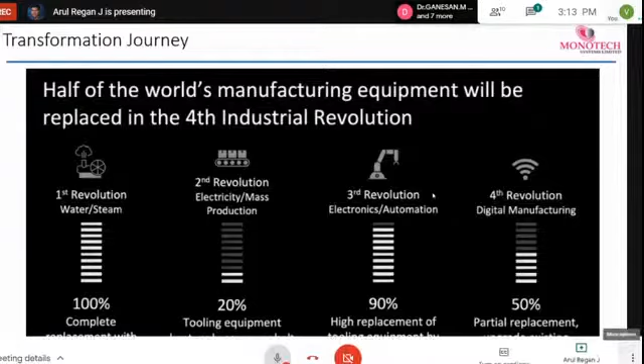Last February, 2020, this was not happening. A lot of professors came and we went to colleges like NIFT and IIT to present the benefits. So if you want to implement some technology, what type of benefit are you going to get? At least you get knowledge to enhance product development, and when implementing something, what type of return on investment will you get? When I invest 5 lakhs, when am I going to get the return on investment? These are the things we are going to talk about in our presentation.

Let me talk about different types of 3D printers. With our complete portfolio, we try to give you solutions, pinpoint the problems and pain points, and provide the solution.

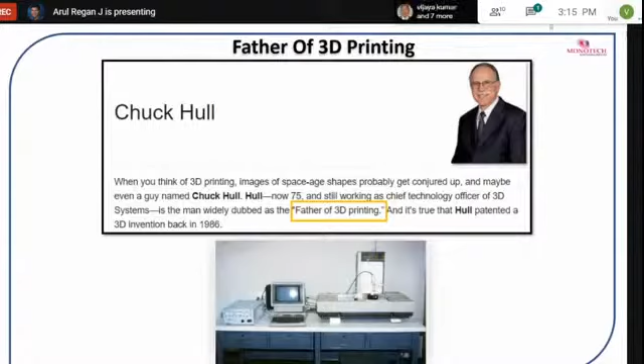When we talk about 3D printing, just as with conventional processes we talk about the father of the lathe machine, the father of 3D printing is Chuck Hull. Most people know about it, so I don't want to explain further. The journey started in 1986, followed by SLS and FDM technologies from Stratasys and other companies. This journey is a revolutionary technology that is still making a big impact in the market. He is the father of the 3D printer. Need is always the mother of innovation, there's no change in that.

This first green cup was produced using 3D printing technology, especially a liquid-based SLA 3D printer. This particular technology is still 100% successful in the market. Chinese players have entered the Indian market, but for this stereolithography apparatus technology, no one is a competitor. Here we use photopolymer resins, liquid-based resin cured with UV laser, to cure the parts and get the plastic part. This is the first video, I'd like to play how this journey started, about the 30 years of 3D printing.

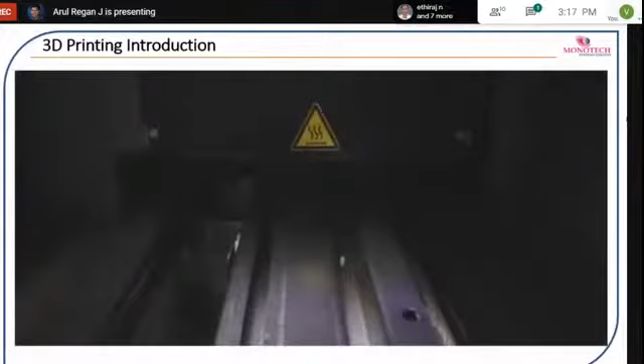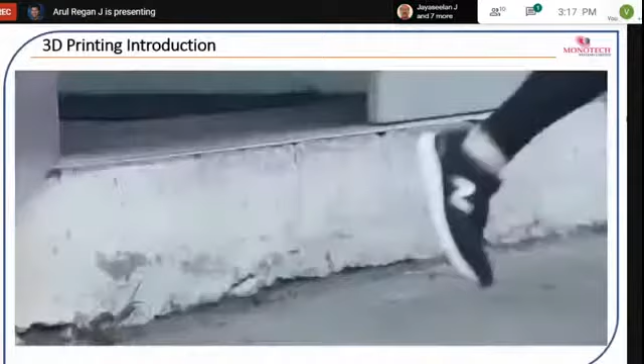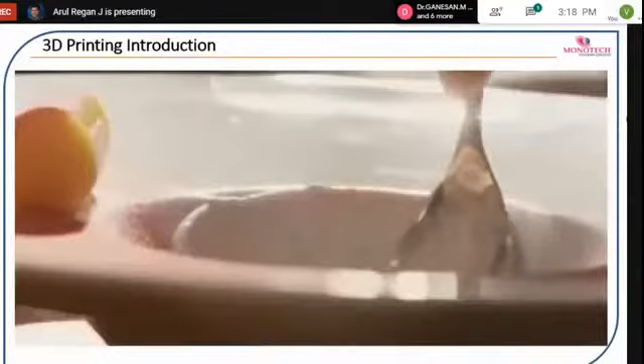It started with a little green cup 30 years ago on a California workbench. A cup that answered one man's what if. What if you could create anything? Design with complexity as limitless as your imagination. Store digital files instead of physical parts. Waste less, manufacture faster, customize products on the fly. One little cup, the first 3D printed part and the future of manufacturing. And where's that technology now? It's in the car you drive. It's in the classroom, it's on the silver screen and in the shoes we wear. It's helping travelers fly through the air and pioneers explore the universe beyond. It's making wheelchairs a thing of the past, and it's giving man's best friend a new pair of legs. It's allowing surgeons to plan and practice medical procedures long before they scrub in. It's producing complex metal parts on demand, breaking down the barriers of traditional production. It's driving new manufacturing business models, making customized and personalized production a reality. It's redefining what it means to play with your food. It's letting product designers, entrepreneurs, and architects share their ideas in vibrant color.

It's enabling designers and engineers to work seamlessly from digital file to physical part and back again, all on the desktop. It's empowering students with the digital literacy they need to become tomorrow's inventors, innovators, and disruptors, and putting parts manufacturing at the tips of our fingers on demand anywhere in the world.

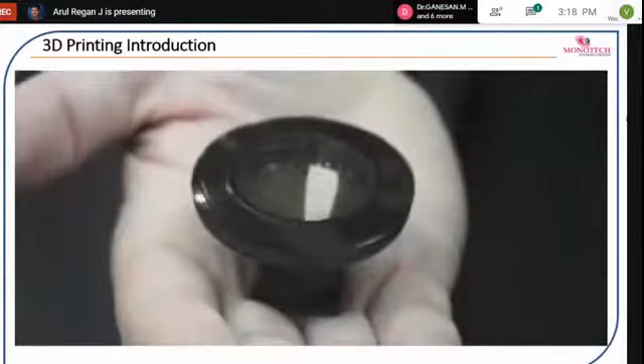Who knew that a tiny cup would lead the way for millions of ideas, inventions, prototypes, and products? That a single stroke of inspiration would unlock the potential within each of us to transform the way we work, learn, and live. For 30 years, our customers have used 3D printing to engineer tomorrow's breakthroughs. What does your future hold?

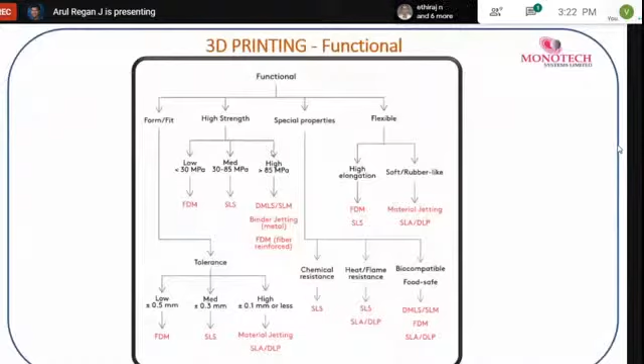I'm also from a mechanical engineering background. So generally, when I studied topics like form fit, high strength, and special properties and flexibility, these are some material science subjects we used to study. So for form and fit and high strength applications, we know theoretically what conventional process is suitable, and we may explore with existing lab facilities. But we can exactly replace these using 3D printing technologies, using FDM, SLS, or other DLP processes. So based on the functionality, how we have to split this, I am explaining in this particular slide.

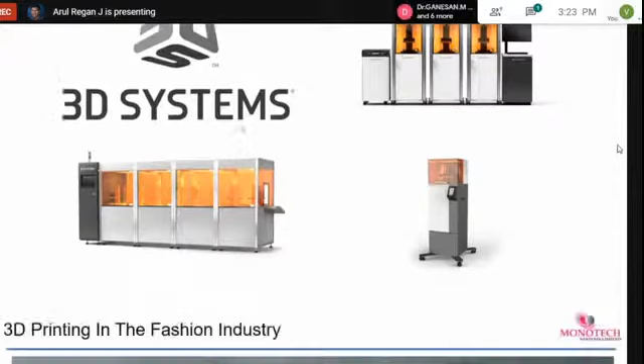Let me talk about a few technologies: digital light process, multi-jet printing, continuous filament fabrication, and reverse engineering. This is figure 4 technology from 3D Systems. Before going to this presentation, I would like to play one video showing how this complete 3D printing technology is fully automated.

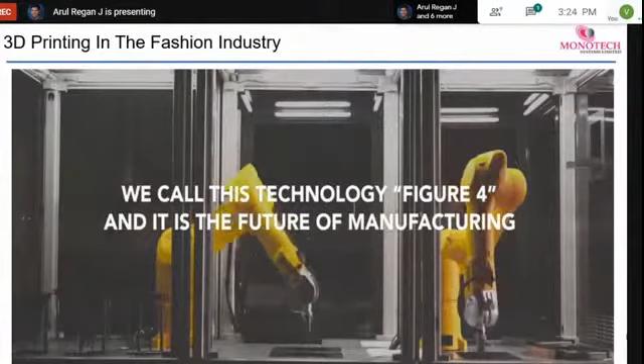The objective has always been to disrupt conventional manufacturing. Prototyping was the first real big application, and it's obviously incredibly valuable. But ultimately, the long-term goal of these revolutionary technologies is to enable something beyond rapid prototyping and to enable manufacturing.

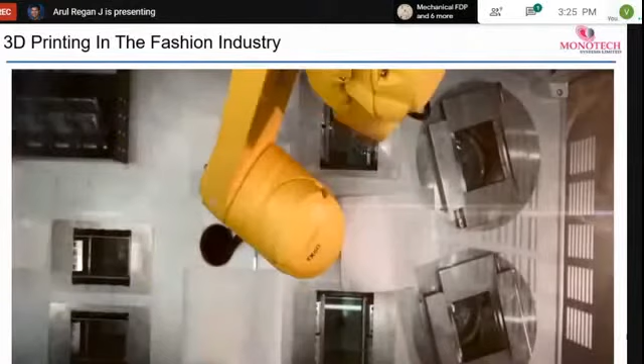We're leading our charge in additive manufacturing with stereolithography because we've honed this technology over 30 years to manufacture many products even today, but we're going to be doing it at a bigger scale with the same accuracy and surface finish that we've provided all those years. This kind of printer is really ideal as a material development delivery tool.

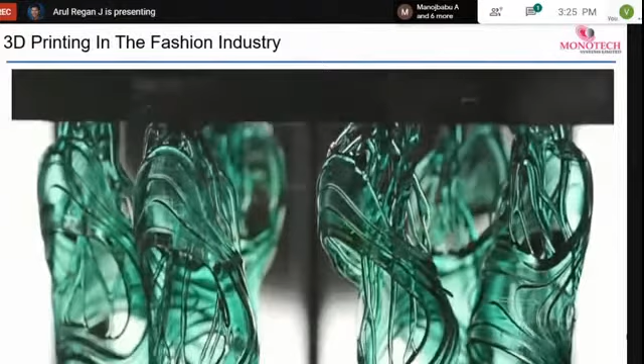A key aspect is that the amount of material it takes is very small, so we aren't bound by the usual requirement of stereolithography where the material has to be stable for a year or two or three years. With this additive manufacturing development kit and the speed of Figure 4, you can now get physical properties that include high temperature resistance, toughness, elastomerics, and biocompatibility, which is the foundation of all the products manufactured today.

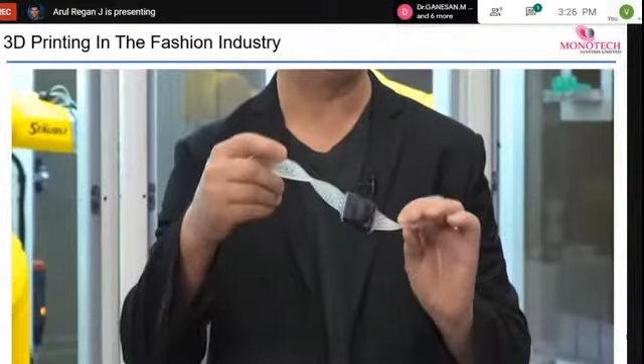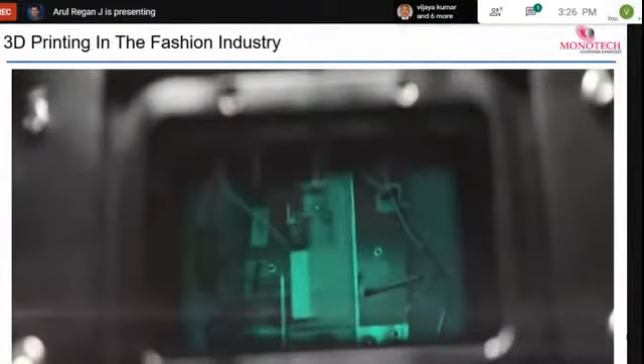The technology is so fast that you can pull geometry—you could pull 100 milliliters from a 250 milliliter vat so rapidly that you can now tolerate extremely unstable chemistries that we would never consider using in the past. This frees the chemists to do more reactive chemistry where they aren't so concerned about having a vat life of years. They can have a vat life of a couple of days or even a few hours, and this lets us formulate and develop a much wider range of materials.

With this class of technology, there's no injection molding tool. Your injection molding tool is a USB key. Your tooling is the CAD file. You walk up to a machine, plug the USB key in, press play, and you're getting parts manufactured locally.

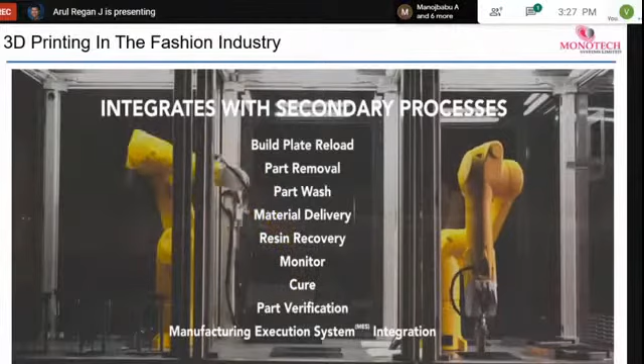This system is exciting in the sense that it's not a box—it's not a rapid prototyping system that you simply install. It's a system that is configurable. You can pick and choose the parts that you want, not just the parts that we supply but other automation tools, and have it fit into the workflow and stream of your factory.

We've already shown this additive manufacturing SDK to some of our key customers, and their reaction has been that this is a step change—it will allow them to unleash additive manufacturing across their organization. After 30 years of bringing this kind of technology up through prototyping and through various kinds of manufacturing applications, it feels really good now to see it starting to go toward mainstream manufacturing.

Really incredible, right? This technology is going to revolutionize the manufacturing market. In some particular areas, it is going to completely replace the traditional way of processing. Why? Because this technology—Google also started working with this particular technology. It is called the DLP process.

This 3D system was introduced in 2019. They introduced this particular technology called Figure 4. It works with, as I told you, a top-down approach. It is categorized into three types: standalone, modular, and production series.

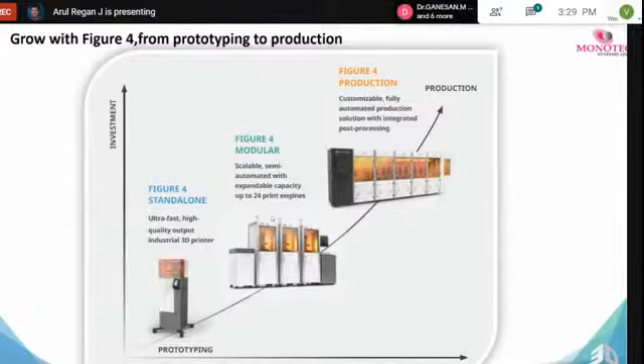Standalone looks like an ordinary printer—manually, we have to upload and print the parts to get them. Modular and production versions are semi-automatic and fully automatic. This has a build envelope size of 220 by 70 by 190, and you get very good repeatability. You know the CPK value for repeatability—it is 0.002 PPM, parts per million.

So it has different types of materials. I will quickly explain about the materials, because based on our requirement, we have to choose the right material with the right technology—that is a very important thing. For example, if you want to do concept and draft models, you want to see the model and how it turns out.

I want to do some kind of functional test—you can go with the tough black material for design and functionality. I want to check the snap locks, fit, and form—so you have to choose the right material, like an elastomeric black or flex black material.

I have experience with MGR University, where they developed some medical components, like bone-type parts, that required only medical property material. For that, we can use high temperature, Med Amb, and Med White materials for direct production, like what we saw in the video—the fully automatic machines, a complete revolution in technology. Instead of making an injection molding part, you can directly produce the part out of this.

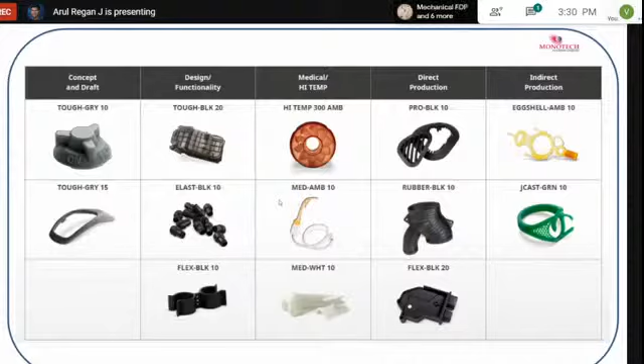This includes Pro Black, Rubber Black, and Flex Black 20. And for indirect production, materials like JCast and Eggshell are used. As I told you, the tough gray material has a CPK value of 2.46.

Next, another interesting technology useful for a few applications is DLP, the digital light process. Again, this is from W2P from Austria, specifically for dental and jewelry applications. It has a build envelope of maximum size 120 by 120 by 130. In DLP, it is a quite big envelope size, and it has a moving DLP process, so with that you can make parts.

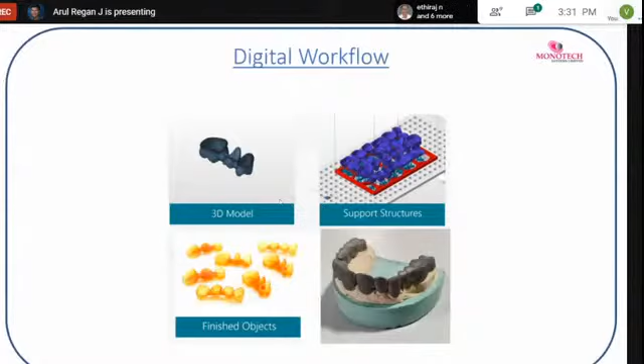This is a workflow with the 3D model. You can align the 3D model and print it. From the printed parts, you can make casting parts, and you can use them for jewelry applications as well, like jewelry studs and rings. It is a castable material, and from there you can get the finished parts.

Next is the multi-jet process. This multi-jet printing is a unique technology. Compared to other technologies, here we are using a wax material as a support material. Whenever we run the 3D printing process, it requires support material wherever there is an overhanging area. This particular technology builds the support material, but it is wax.

We can easily remove the wax material, and it is plug and play. You can use it for some medical applications as well, because it's precise, fast, and simple. You can also use it for functional prototypes, concept modeling, and rapid tooling.

You can make honeycomb structures inside the part to reduce weight without compromising strength. You can also make assembly parts, fixtures, and fluid flow testers for final year project research. If you want to do fluid flow testing, you can make the parts out of this.

Why? Because this technology delivers high accuracy parts. The layer thickness of this particular technology is 32 microns, or 0.032 mm. Because of that, you get very accurate parts from this technology.

This technology's materials are categorized into four ways: rigid material, durable, elastomeric, and special material. With the special purpose material, we can make an injection molding tool using M2S HT90. With rubber-like material, we can produce parts. If you want semi-transparent or translucent properties, you can use Armor or ProFlex material, and for other properties you can go with rigid material.

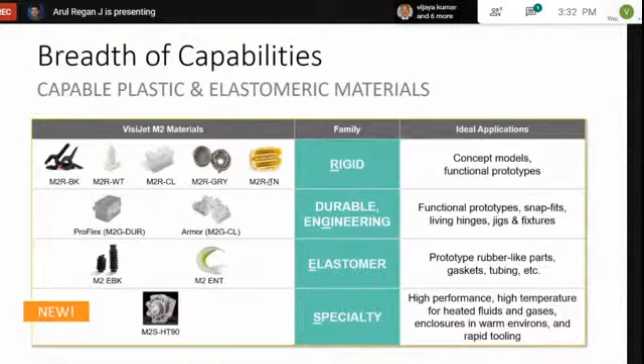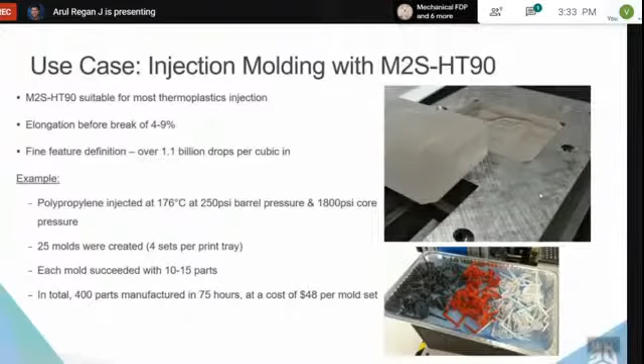This is a real-time example: 400 parts were produced in 75 hours. This particular die was made out of MJP technology using HT90 material.

Another interesting technology, let me talk about a few points on CFF, continuous filament fabrication. When I work with IIITM and some other colleges and universities, they are very focused on working with composite material, because composite material is going to make a big impact in the automotive sector. We are moving into BS6, with the changeover from fuel to hybrid vehicles, then fuel with battery, then moving fully to battery. This journey is going to happen in this way.

With this hybrid vehicle, if you reduce the weight when running with the battery, you get much better fuel efficiency. For that, this kind of CFF process will help. It is categorized into three ways: desktop printer, industrial, and metal printer.

For example, in the desktop and industrial series, we have a composite material called Onyx. It is a composite material of polyamide with chopped carbon. You can also reinforce the material with reinforced carbon fiber, Kevlar, fiberglass, and HSHT material. If you add a reinforcement material, it gives strength like aluminum.

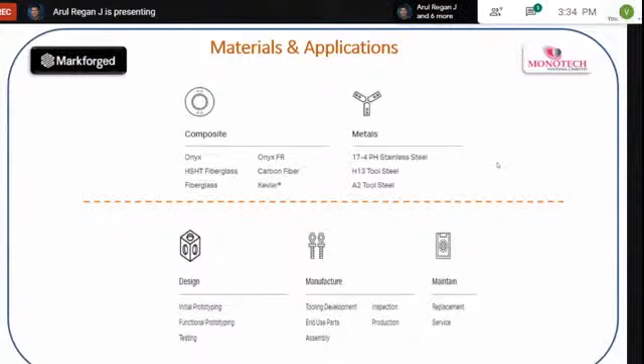We also have metal 3D printing with us. This technology can produce parts in stainless steel, tool steel, Inconel, and copper. These technologies help with assembly, design, manufacturing, and maintenance. In manufacturing, assembly also comes under this category.

The build envelope size of this particular technology is 330 by 270 by 200. We have to note that down. The key takeaway from this slide is that it gives 800 megapascals tensile strength, which is almost equal to an aluminum part.

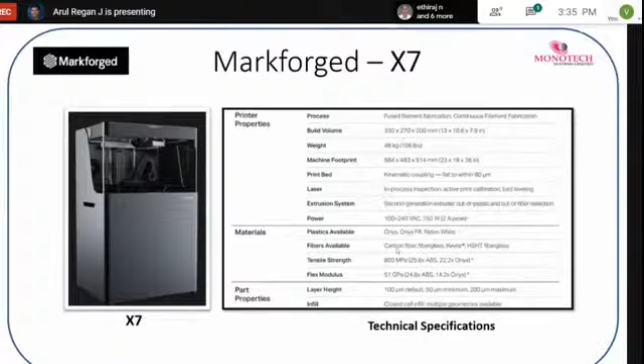Those aluminum levers may be machined, forged, or cast parts, but now they are completely replaced using composite outputs. If you want, check the latest bikes like Apache and FZ and other new bikes - it's completely a composite output. It won't break, it will bend. So this material will deliver parts that are near to the real-time application.

If you see this particular video, it is a very small video. Just let me change the setting and I will show it to you.

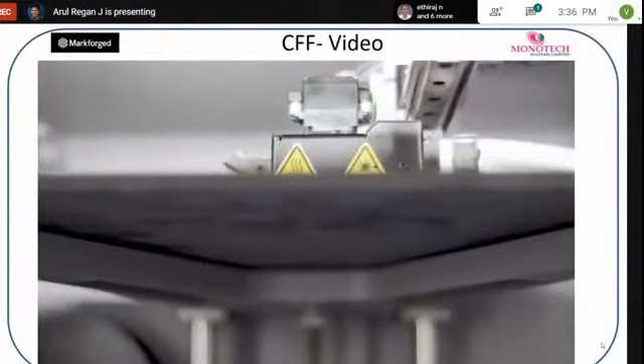This part was reinforced with continuous carbon fiber on a Markforged printer. It's 23 times stronger than plastic, with a significantly higher strength to weight ratio than aluminum. What does that mean for you? It means that for the first time ever, you can print high-resolution, affordable, complex parts that don't break. You go from idea to end-use part in less than a day.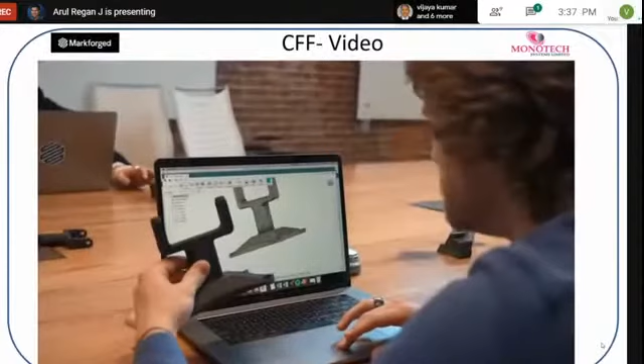However you choose to change the world, we're here to help you do even more. Reinforce your part with continuous strands of carbon fiber, fiberglass, or Kevlar. Our cloud-based print management software optimizes your print for you, making the transition from CAD to part easier than ever before. Are you ready to bring your manufacturing operation into the next industrial revolution? Request a sample part from Markforged today.

So you've seen what Markforged can deliver - you can't break it. We have that machine with us. If you want to explore these machines after COVID, we welcome you to see our facilities. And if you are working on composite projects, we are ready to do job work for you.

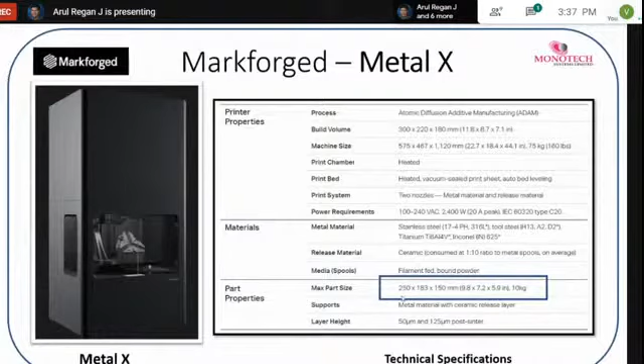This is another interesting technology called Metal X. This particular Metal X has a build envelope size of 250 by 183 by 150 mm, and we can print it. It is completely unique from other technologies. I don't want to play this video, but with this technology we can use stainless steel, tool steel, Inconel, and copper material. Copper has some unique conductive properties, so we can't use it in other 3D printing technologies. Copper is very, very difficult to make.

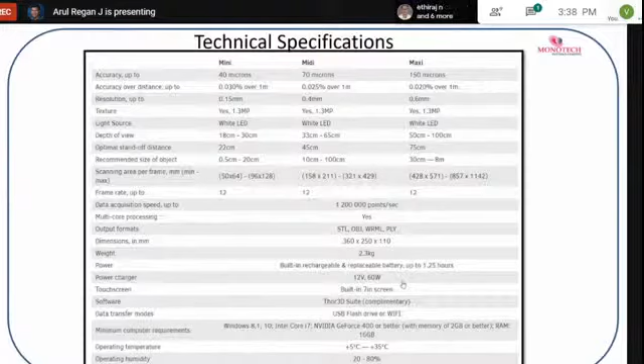So next, let me talk about the 3D scanner. It is a 3-in-1, non-contact 3D scanner with white LED scanning. We can scan small objects as well as big objects, in a range from 0.5 centimeter to 8 meters, and we can get 40 to 50 micron accuracy. It has a 1.3 megapixel camera and white light LED. We get output in STL, OBJ, and PLY files. Generally we scan the model, transfer it to 3D printing, and get the 3D model - I will give you some real-time examples in the coming slides.

This scanner is categorized into 3 ways: mini, midi, and maxi. Here is another small interesting video showing how this particular 3D scanner is working - we can scan humans as well as objects.

It is a wireless, non-contact scanning technology. We can use it for reverse engineering, education, medical applications, quality checks, and industrial design applications.

Let me talk about a few different applications. Most of these are achieved using our different technologies associated with different industries. Generally, applications are categorized into 4 or 5 ways: concept and functional prototype, rapid tooling, end-use part, and custom design.

If you want to make a concept communication model, we have solutions like CJP, SLA, and FDM technology. For validation purposes, you can use SLA and SLS technology. For pre-production, production, and mass customization - as I showed you with the molds - we can make these using X7, the CFF process, and multi-jet printing for pre-production.

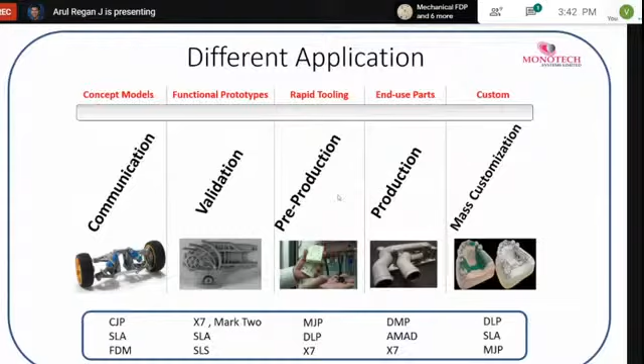For production, we can use direct metal printing. ADAM is another metal 3D printing process - it's called Atomic Diffusion Additive Manufacturing. For custom designs, I will show you an interesting video of how these technologies are used for aerospace and other applications. I'll play this forward in between to avoid running short on time. Okay, thank you.

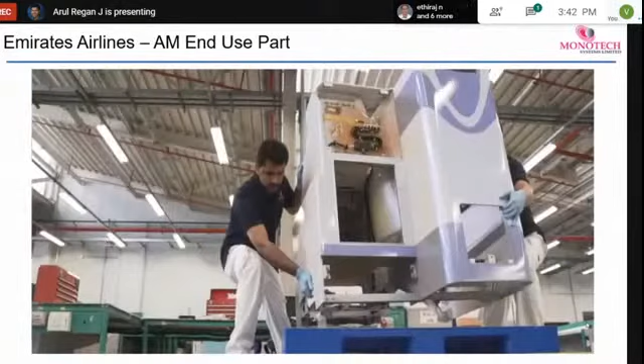Innovation has been at the very heart of our business objectives and the machinery of delivering on these business objectives. We started experimenting with 3D technology back in November 2014. We were looking for alternative, faster, cheaper methods of delivering bespoke parts for our cabin. That's when we started experimenting with 3D printing to deliver what we would consider a fit-for-purpose part.

The plastic that's been developed using 3D Systems SLS technology will be the world's lightest plastic approved for civil aviation using 3D printing.

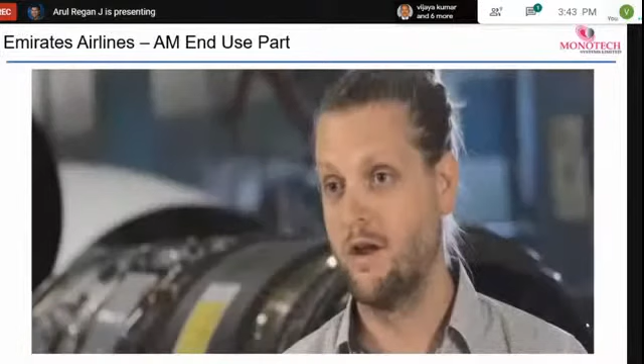There are two main benefits to 3D printing for the airline industry. The first is inventory and cost reduction. Historically, airlines have had to maintain large volumes of stock for every individual piece inside their cabin. Now, the powdered plastic becomes your inventory, and the CAD becomes your tooling.

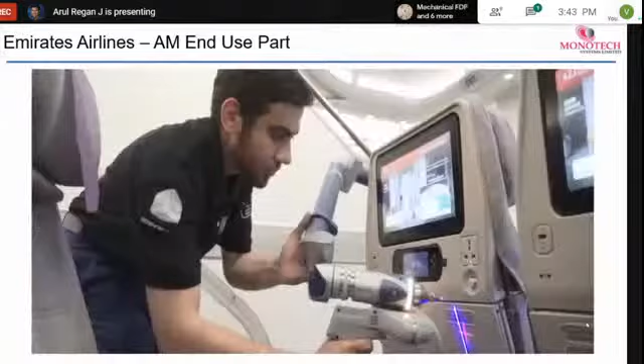One of the common problems in the aerospace industry is that people don't own the CAD files for all of their parts. 3D scanning gives you the ability to collect a significant amount of data very quickly and very accurately. Utilizing 3D Systems Geomagic DesignX, we're able to turn that data into a parametric CAD file.

If you consider it from a monetary perspective, every kilogram we carry costs. You can create parts that have improved functionality and 25% less weight. This gives you an improved strength-to-weight ratio, a reduction in overall weight of your aircraft, and at the bottom line, better fuel savings and better fuel economy for aircraft.

You wouldn't believe it, but in aerospace, more than 3,000 parts have already been replaced using 3D printing. I recently attended Boeing and Airbus presentations when I was with HAL. They showed real-time examples of the parts, categorized into two ways: critical and non-critical parts. Most of the non-critical parts have already been replaced using 3D printing technology.

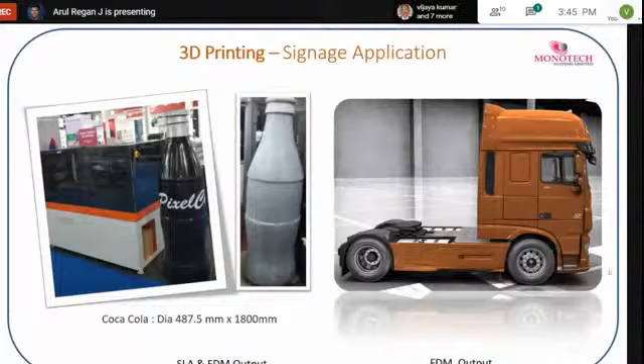For example, for signage applications, we have solutions using our FDM technology. We have a 1 meter by 1 meter technology. These Coke bottles and trucks were all printed using 3D printing technology. This burger, shoes, and Hulk model were all printed using the FDM process, and we painted them ourselves. So it's for signage applications.

Signage is our big world. Whenever you go to McDonald's and other malls, you might see big statues and big Coke bottles — those kinds of parts are made using prototype technology. And mannequins — whenever we go to buy dresses, you might see these mannequin statues. Generally, mannequins are made manually, but you can also use 3D printing to create this kind of mannequin.

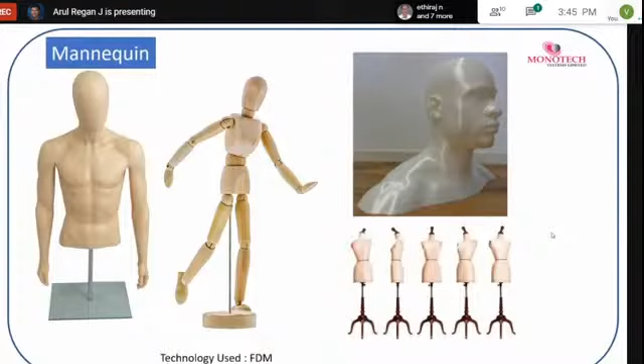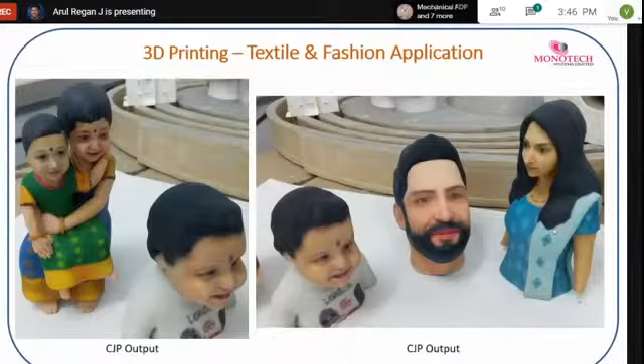With color jet printing, you can print in complete color. In Make in India, I'm going to give you a brief about our own innovative technology, how we can print this kind of color parts. These are some gifted samples we printed using our color jet printing, from 3D Systems. We have our machines, the ProJet 660 Pro, and we can produce millions of colors. Based on the color you give us, you can get the exact color from the machine.

This is a real-time example, which I'll explain more when talking about Make in India. We specialize in this kind of project, so if you want to do this kind of project, we are ready to serve you — for example, making a lab with cross sections of engines. If you have a 3D model, we're very happy to work with you, because the 3D model based on your application is very essential. We have a complete portfolio of 3D printing, so based on your component size and profile, we can choose the technology and print it. We can also use it for some defense applications.

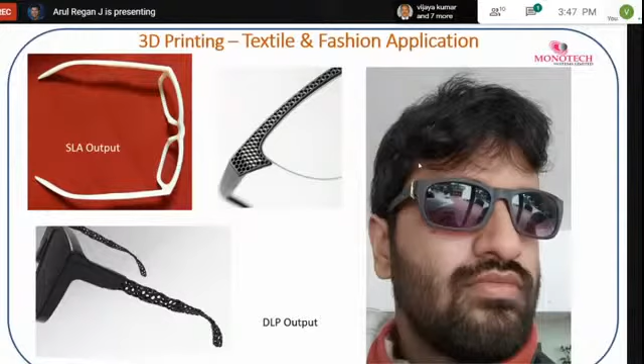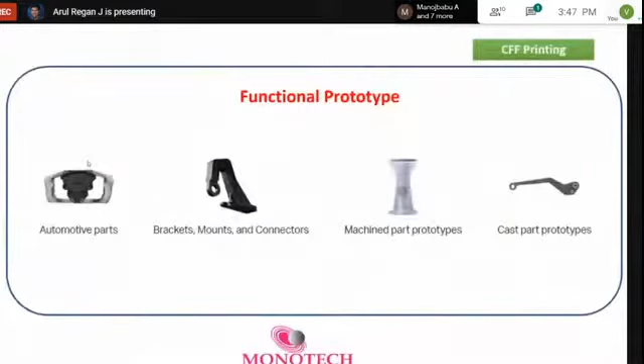And for functional prototypes, this eyewear part was completely printed using 3D printing, and we can use it — you can fix the lens and use it. You can customize it; instead of making it fold as one single part, you can make this kind of eyewear too. Apart from that, for concept prototypes, you can make connectors, small sand casting patterns, core boxes, and print them directly. Functional parts can be produced using the CFF process, and as I told you, we can use it as a functional prototype to make jig fixtures, cages, and other tool holders.

Inspection fixtures, fan holders, and end-use applications. For example, we have a car with a clutch and brake lever, which is an 8mm thickness sheet metal part. We can replace that using composite material. We are working with some automotive companies, and given the COVID lockdown pandemic situation...

There was a demand for ventilators, so using 3D printing we can make splitters. We already made a few splitters using our 3D printing technology. These splitters can help one ventilator be used for two patients.

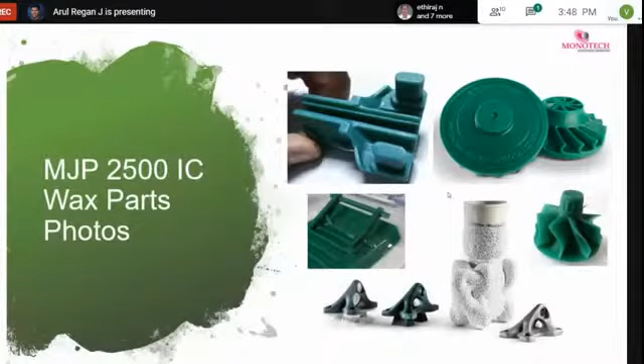You can also make customized safety masks, and for tooling applications, wax printing. Using this wax printing process with multi-jet printing 2500 IC, you can make an investment casting pattern, which you can use in investment casting and convert into metal. For tool development and testing applications, you can make injection molding tools, form tools, press tools, soft jaws, and more.

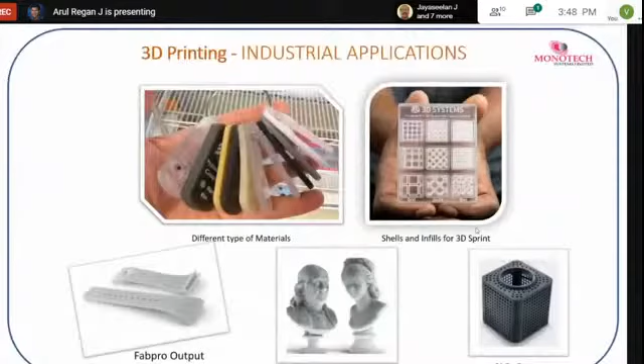You can also make statues out of multi-jet printing and color jet printing. As I told you, we have different types of materials, and based on the application we have to choose the right one. Other applications include jig fixtures, cages for industrial applications, and end-use parts.

For example, this mask was printed using our FDM technology with PLA material, and we can use it as an end-use part. You can cut an N95 mask and put it inside, and use it as a mask. Here's another real-time example.

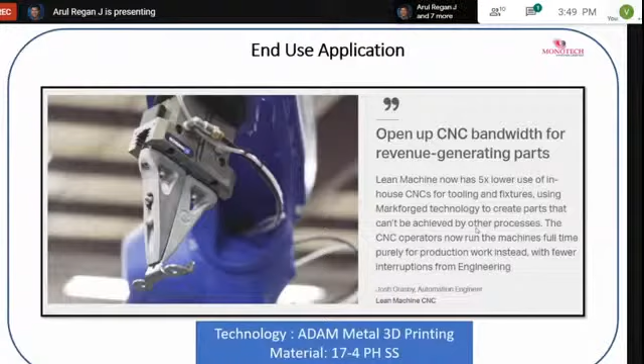These robotic arms were printed using our ADAM technology, and they are used in the assembly area. You can make assembly tools, welding fixtures, locators, and other end-use parts.

You can replace a metal part with a composite part. Why? Because, as I told you in another video, you can get aluminum-level strength from composite material. For production parts, jig fixtures, and cages, it is also possible with composite.

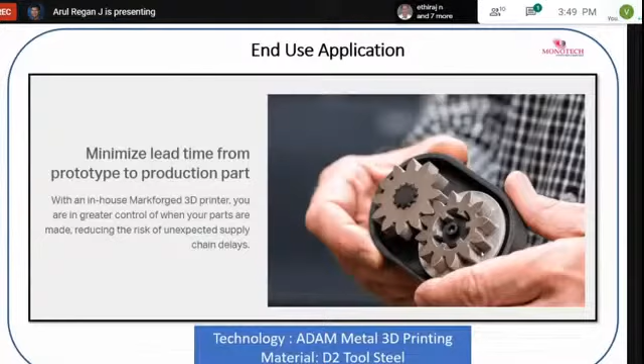If you want to make a gear, it's very difficult using conventional processes. With 3D printing, it's very simple—within 3 or 4 days, you can make such gears for end-use applications. Here's another example.

Apart from that, you can use a Markforged printer for composite printing. You can make composite tools, for example a plastic handle with a metal-like functional area, so you can reduce weight without sacrificing strength.

You can make tools out of different processes like resin-based, metal powder, and ADAM process, as well as custom mass customizations for fashion technology applications. Here's another short video showing how fashion designers are using this.

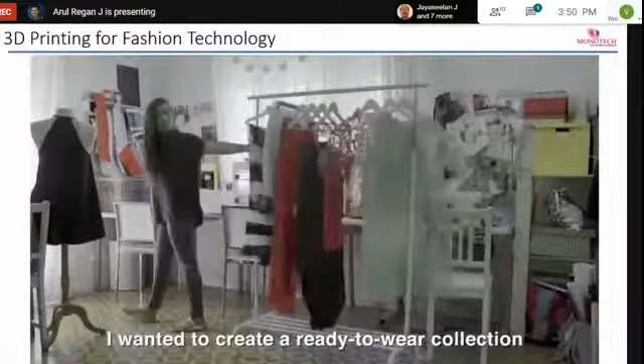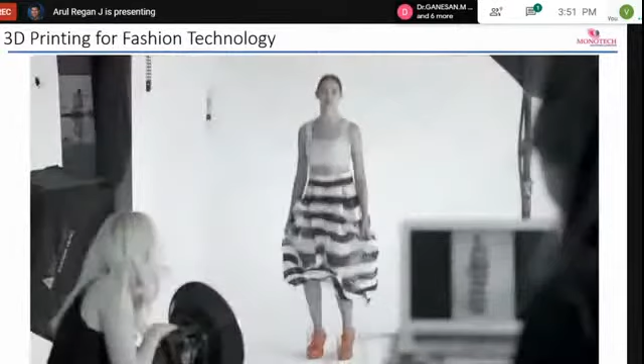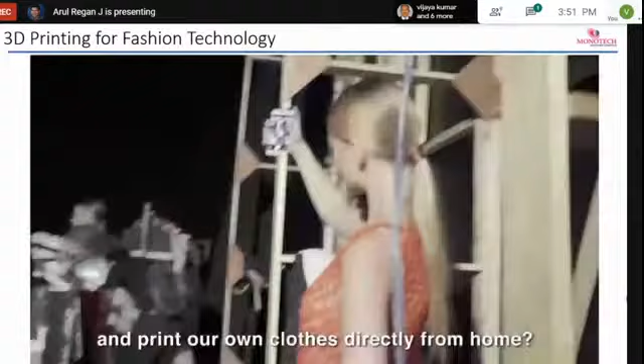My name is Danit Peleg. I've just graduated from Shenkar College of Design. I wanted to create a ready-to-wear collection printed entirely at home, using printers that anyone can get. I've spent the past year searching for the best solution, and worked with leading experts in the field. I really like the result—it looks a little bit like lace, and it moves beautifully. Just imagine the potential: if you could print your own jacket, you could travel with no luggage and just print your clothes in the hotel room. Will we soon be able to design, share, and print our own clothes directly from home?

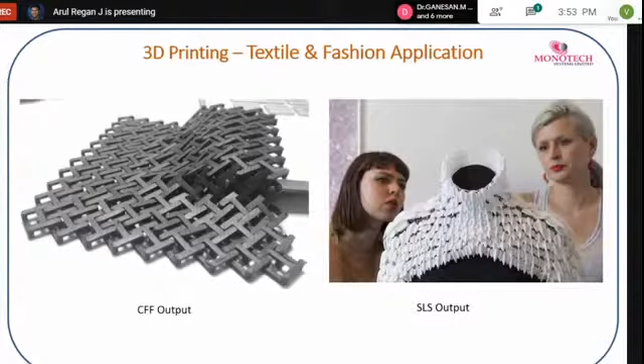This particular textile application part was produced for NIFT, and it can be used for textile applications.

If you have design engineers with you, like we have a service provider, we can print it within a day. This particular concept was designed and developed in 3 hours. Whenever we compare with anything, we generally compare it with the existing process.

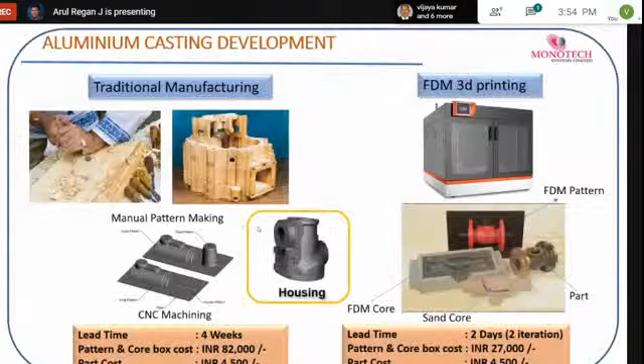So I'm going to explain some real-time examples of how we are breaking the barriers of traditional manufacturing with 3D printing. This kind of housing, if developed in the conventional way, requires 4 weeks. In the 3D printing way, using patterns from the FDM process, it requires only 2 days.

This is a scanned part, which we got from 3D scanning, and we printed the 3D printing pattern from the 3D model. That 3D printing pattern, under the sand casting process, gives us aluminum parts. We demonstrated these things as a live demo at IFEX in Chennai Trade Center.

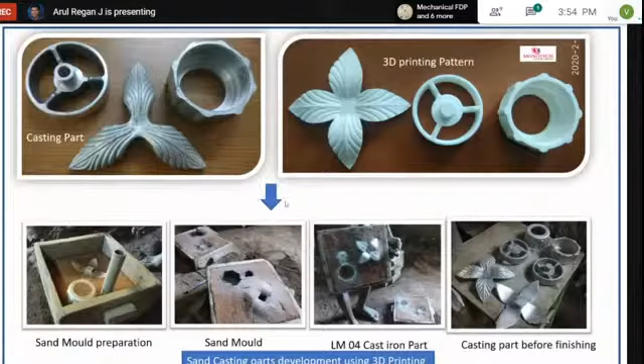A rubber component, if you want to make it using multi-jet printing, we can make rubber parts instead of compression molding. In investment casting, as I told you, we are the exclusive partner. If you want to make a wax pattern, it's possible using MJP technology, which we can use for medical, engineering, aerospace, and other applications.

For speedometers and automotive parts, instead of going the conventional way with sheet metal and injection molding, you can directly produce them using the FDM process. You can save a lot of time.

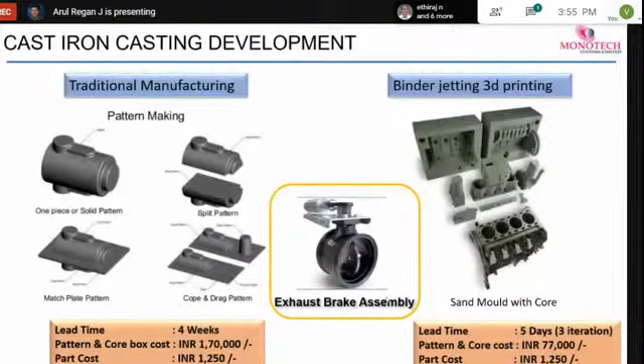For sand casting applications, binder jet technology is perfectly suitable - with less time we can make a mold and core. In the CFF process, instead of making an aluminum or metal part, you can go with composite material, and within 2 days and 2 iterations of lifting tools, we can make it.

For hydraulic actuators, as a real-time part consolidation example, you can combine all 3 parts into 1 part. If you print that 1 part using ADAM, atomic diffusion additive manufacturing process, within 3 days you get the prototype parts. With the conventional process, it requires a minimum of 1 week to make the parts.

And for Make in India, we can proudly say we are working with Make in India - it's like a photo booth and desktop FDM printers, for photogrammetry applications and visualization, selfies, statues, and signage applications.

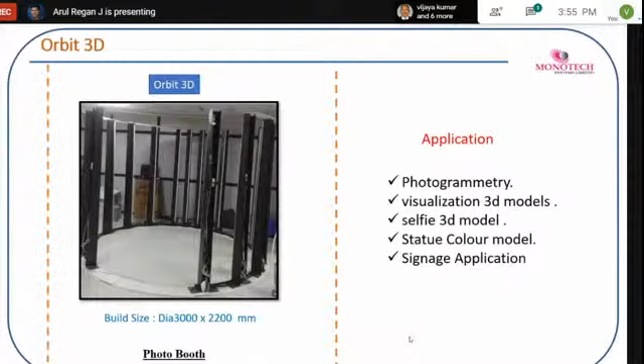This is the exact setup we have in our center. I'd like to show you this particular example - these are 2 colleagues who work with me. They stand inside the photo booth, and within less than 1 minute, taking 1 photo with 86 cameras, you get a complete image of the human, and you can transfer that 3D file.

You can work on it using ZBrush and similar tools, transfer that file, and get the exact output from color jet printing with color. So these are people who work with me - we took photos and printed them out using CJP technology.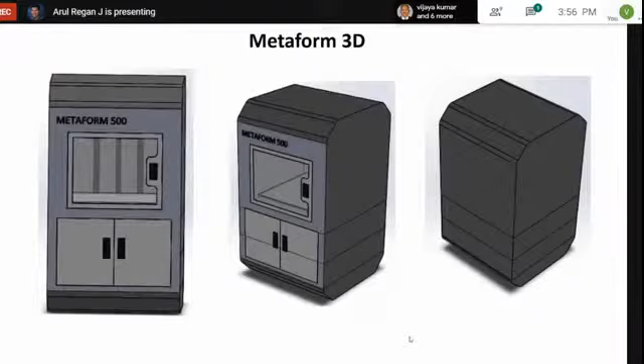Another milestone - we are starting to work on making our own FDM technology with less cost and quick, precise parts, using what is generally German engineering. We're going to create our own Indian engineering version, and it will be easy to use.

For facilities and services, whoever is interested, we warmly welcome you all to come and see our facilities. It's located in Ambattur, Chennai. We have around 7 different types of technology - a 1 meter by 1000mm by 1000mm FDM printer, and a small 200 by 200 by 200 FDM printer.

Apart from that, we have a CFF continuous filament fabrication setup. We have a separate DLP process - digital light process, color jet printing, stereolithography apparatus - and a separate MJP lab for investment casting and plastic.

And we have a photo booth, and we're associated with a big chocolate company like Amul, and we're associated with Procusini - we are the distributor for India. It's a chocolate printer to make chocolates out of chocolate raw material, and you can eat that chocolate. Maybe in future you might see this kind of chocolate printer in a lot of malls in Chennai.

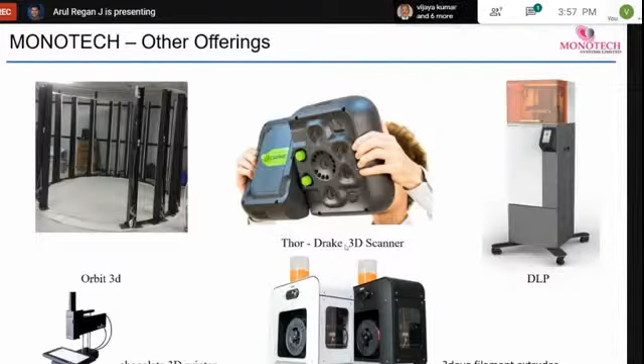And 3devo for filament making, Thor scanning for scanning, and DLP for production applications. These are the services we are providing. Apart from these few things, we also depend on our OEM and other services we provide.

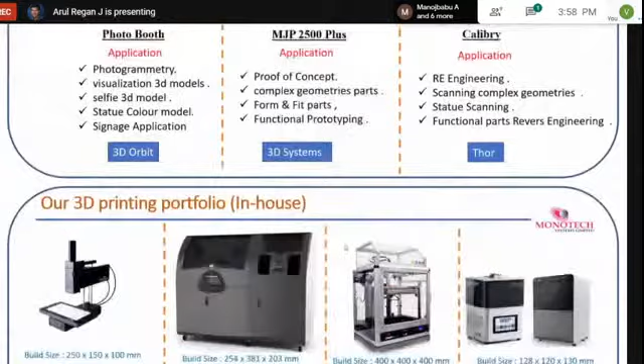These are the technologies we have, along with the build envelope sizes and key applications we work on: photobooth, multi-jet printing plus, and Calibry scanners, and chocolate 3D printing for food applications.

CJP for architectural applications, jig fixtures, concept modeling, cage, and DLP for dental, jewelry, and functional prototype applications. These are the other OEM offerings from us: AmSky from China, DMP from Germany, and Admetech from Germany. We also have metal 3D printing with us, called MetalX, from the USA.

Now I'll quickly go through the materials: thermoplastic material for FDM, and composite material for the CFF process, which has very good strength equal to an aluminum part. The CFF process also has copper and metal materials available.

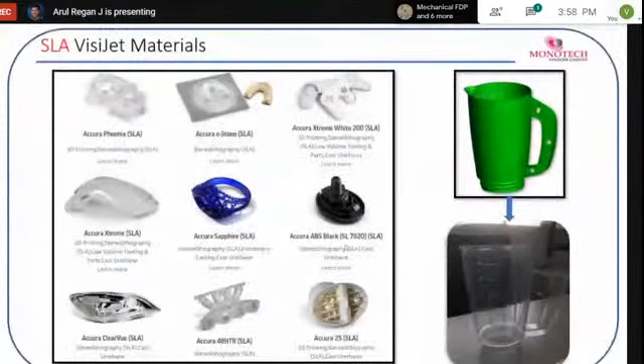Stereolithography apparatus uses an epoxy-based resin material - you can make this kind of parts from that. Multi-jet printing uses an acrylic-based resin, and using that resin you can produce parts.

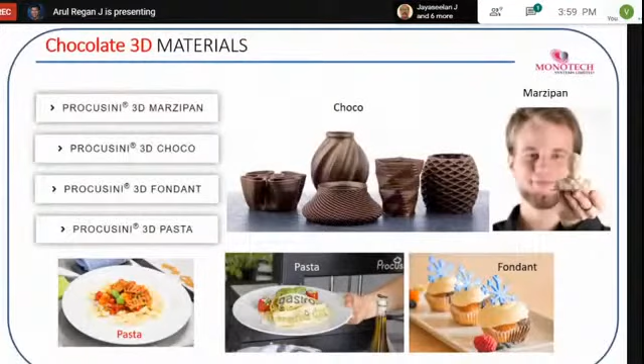These are the materials available with wax printing, and for selective laser sintering we can use thermoplastic material. This is another chocolate 3D printer - you can make chocolate statues and pasta shapes with our chocolate 3D printing technology.

Color jet printing produces color parts using gypsum-based powder. DLP process is used for batch production and other applications, binder jet technology for sand casting applications, and direct metal printing for dental and other applications.

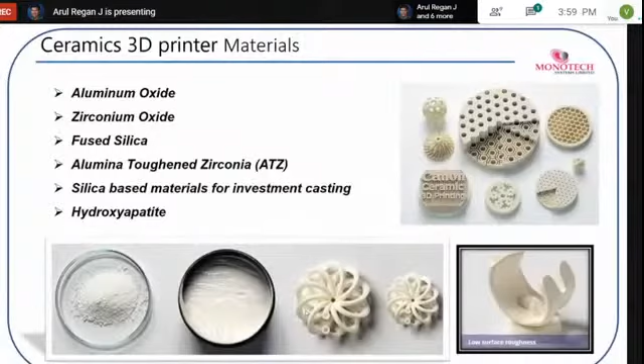These materials are available for reverse engineering applications. You can use our Thor scanners for reverse engineering - if you want to scan a human object, everything is possible with this. With markers we can scan the object, and without markers we can also do the scanning.

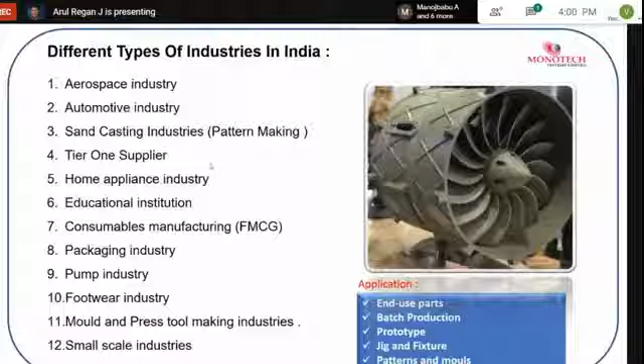So I've explained so many things. You may have a few doubts about how to get the services, or whether you want to buy 3D printing or not. Please educate your students.

This is, on behalf of Monotech, our recommendation: design for additive manufacturing. If you teach students - instead of just design for manufacturing and assembly, which I also studied - design for manufacturing assembly is different.

With the help of college and other things, I enhanced my knowledge in the 3D printing field. So if you learn design for additive manufacturing - like topology optimization, lattice structures, multi-scale structures, and part consolidation and all - it helps us get jobs in different sectors.

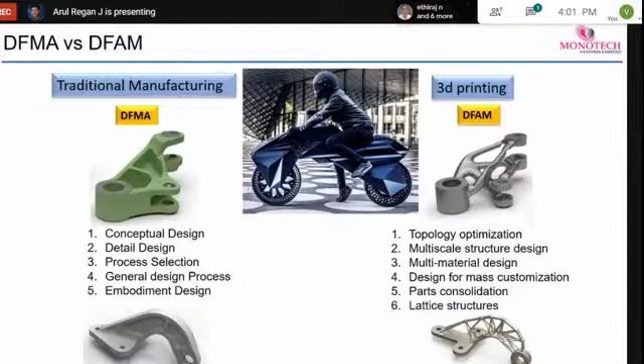And 3D printing training - similar to how we conduct programs, if you conduct programs for students, it helps. And whoever wants to start a startup, we provide 3D printing services - if they want to buy machines they can buy, otherwise they can get services from us.

And 3D printing service bureaus - we are connected with more than 20 service bureaus in India, so we are one of the big scale service providers.

And shop floor operations - as I invited you, you can come anytime and see our facilities. It will give you a better understanding of the process.

So what are the challenges we have? Lack of understanding, lack of experience, lack of university integration with industries - only a few colleges like yours integrate with industry - and lack of local bureaus, government funds, and all. There are some issues, and due to these kinds of issues, these kinds of problems come up.

So, with 2 decades of our experience, we are creating our own machines from our own technology, with in-house R&D and manufacturing facilities, and new business exploration and development. And we have a very good sales, technical and application support.

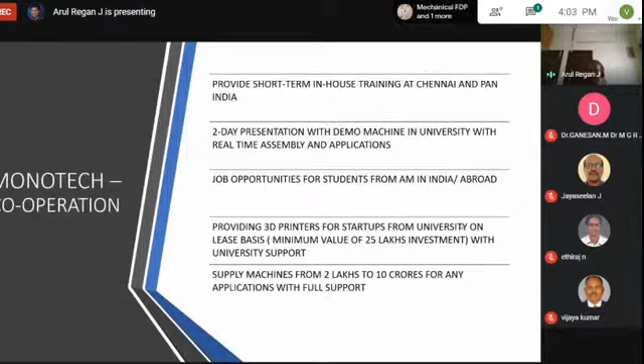Especially, I am taking care of the application part for Pan India, and I can support any technical queries. We generally provide 2-day training programs and short-term in-house training programs if required, and from there we can get some job opportunities and provide 3D printing for startups. We supply 3D printer machines ranging from 2 lakhs to 10 crores if required.

Apart from that, in Metamorph Lab we do consultancy. If known companies require any support from us, we go and visit the factories, identify the correct applications, suggest suitable material and technology, and compare the existing process with 3D printing to provide optimal solutions. If required, we develop benchmarks and provide complete solutions, justifying the services and return on investment. Overall, we provide complete solutions.

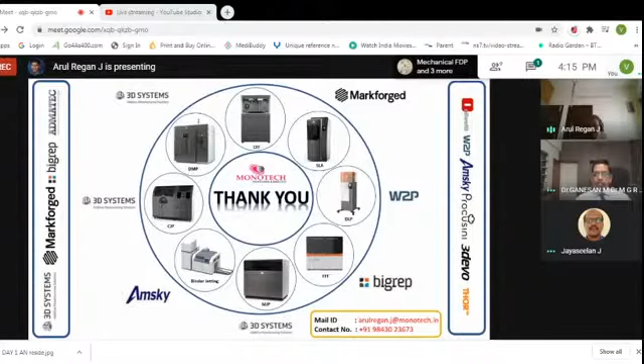That's also a good question. Many professors and people are already working with us. It is available in our Ambattur Chennai plant—we have 2 CFF technologies, around 300 by 200 by 200 mm build envelope size. So anytime you can come. If you can't come due to the pandemic situation, and you'd like to work with us, you can share the file along with your requirement, and I can help you out.

Any other questions from the organizing panel side, sir? Sir, I am Dr. Ethiraj, I have a question. Yes.

Actually, maintaining the raw material wire is a real problem. If it is exposed to air, it becomes brittle and breaks. Is there any other way of maintaining that wire? Yes, this is a big problem for those using FDM technology. There are some routes to eliminate moisture from the plastic material, because these are thermoplastic materials made into 1.75 mm filament. So to avoid moisture, you want to do some preheating.

I don't know if any industry people here work in injection molding—when you want to do the process, they preheat the material first, then process it. Few people know about this. Similarly, you want to do preheating for half an hour or 45 minutes using a bulb or some heater. If you preheat the material, the moisture will go away. For all thermoplastic material, especially FDM based material, you want to maintain a particular temperature—this is mandatory.